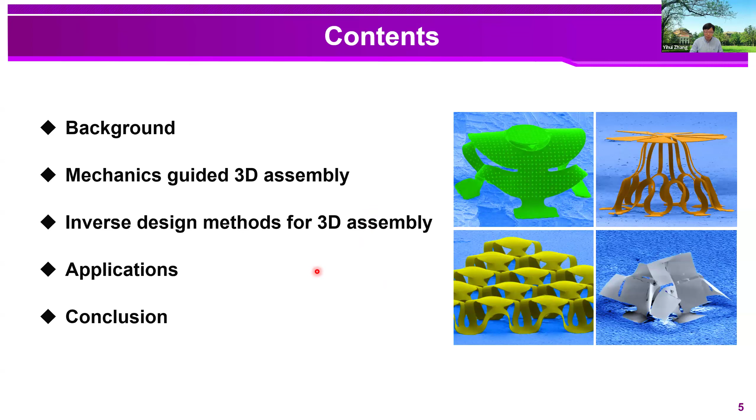Since the third dimension can bring brand new opportunities, 3D microelectronic devices have already become an important research direction in the era of post-Moore's law. When compared to 2D designs, 3D electronic devices can provide broader design spaces, better mechanical and electrical performances, and even brand new functions. For example, Professor Dae-Hyeong Kim from Seoul National University and Professor Young Min Song from GIST have made inspiring progress in bio-inspired electronic eyes. In this specific work, inspired by the unique structure and functional features of the cuttlefish eye, they have devised an artificial vision system that can enable high contrast and high acuity imaging even under uneven illumination conditions. This is attributed to the unique structural features.

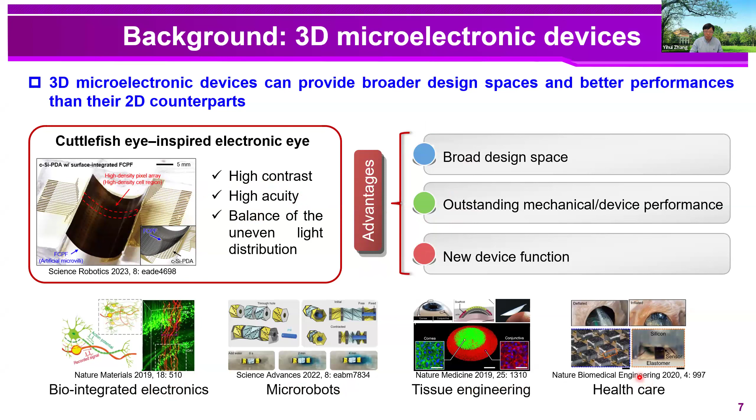Because of these outstanding advantages of 3D designs, 3D electronics have very important applications in bio-integrated electronics, microrobots, tissue engineering, and healthcare, with the potential to upgrade their device form. Then let's look at the geometrical and physical features of 3D electronic devices. These electronics usually have very small feature sizes, sometimes down to micron scale and even sub-micron scale. They typically have complex 3D shapes, involving, for example, multi-layer ribbons, curvy surfaces, and even hierarchical constructions. Under external loadings, for example, if you compress it, stretch it, or rub it, these devices show strong nonlinear mechanical responses. Additionally, these electronics usually contain multiple different functional components, including sensing components, actuation, wireless communication, and data acquisition modules. Because of these features, it's extremely challenging to achieve customized design and fabrication of 3D electronic devices.

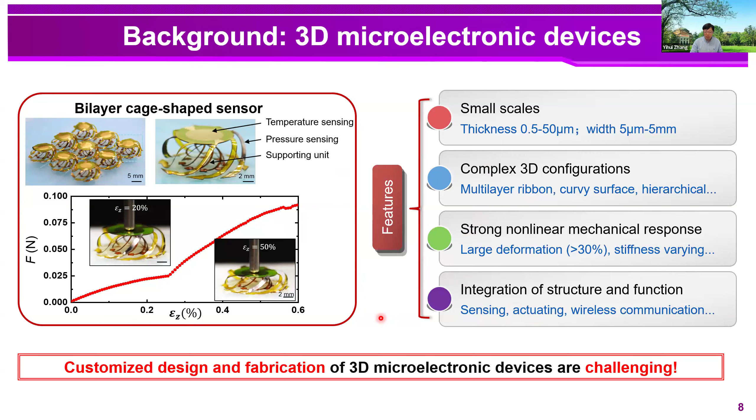In particular, the microfabrication techniques well established in semiconductor industries work very well for 2D inorganic devices and do not work directly for 3D fabrication. For example, this table summarizes some representative fabrication approaches for 3D electronic devices, including stacked 3D integration, residual stress-induced 3D assembly, peeling-induced 3D assembly, capillary force-induced assembly, and FIB-induced assembly. Each of these methods has its own advantages and disadvantages, as summarized here.

For example, the stacked 3D integration scheme can enable 3D devices with high integration density and also high machining accuracy. But because of the complex fabrication process, it's very challenging to achieve highly complex 3D geometries like a sphere or 3D networks.

The peeling-induced 3D assembly is a very creative method developed by Professor Huajian Gao, who is now working at Tsinghua University, and also Professor Xiaodong Chen from Nanyang Technological University. This method utilizes plastic deformations induced during the peeling to enable the transformation of 2D structures into sophisticated 3D architectures. This method works very well for metals and polymers, but remains challenging for semiconductors like single crystal silicon.

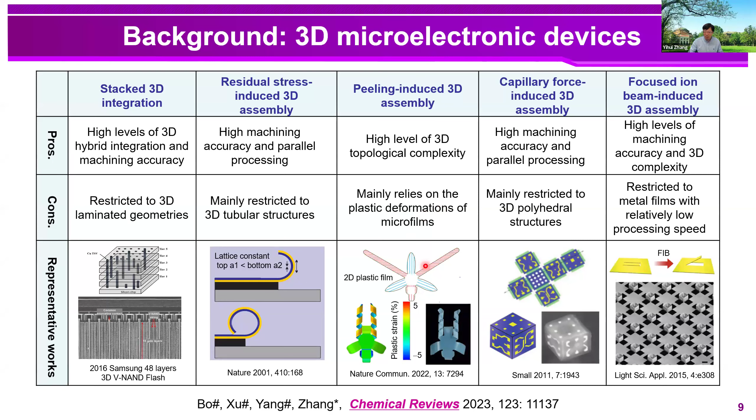So if we use a radar graph to compare these approaches in terms of material type, geometric complexity, fabrication speed, fabrication precision, and level of functional integration, you will see a large blank area in this region. Therefore, a grand challenge in the field is to develop an approach that can enable fabrication of complex 3D electronic devices in inorganic semiconductors and other high-performance materials.

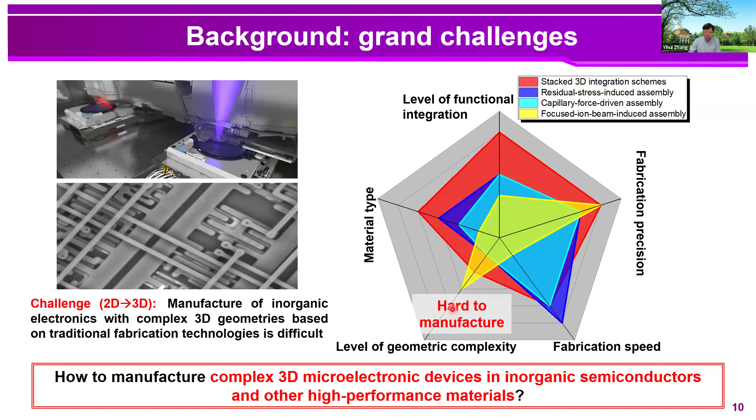So to address this challenge, we started relevant studies in 2012, and now we have established an approach distinct from all of the previous ones. The key idea is to go one step further beyond traditional 2D fabrication by using compressive buckling to deform easily patterned 2D structures into well-controlled 3D architectures.

After devising this approach, an important aspect involves exploration of the class of 3D geometries accessible to this approach. Another fundamental question is how to develop quantitative mechanics models that can serve as a basis for inverse design. This is also to answer the question of how to map the target 3D configuration onto the initial 2D pattern. In addition to developing the approach itself, we are also interested in exploring some unique applications enabled by this singular approach.

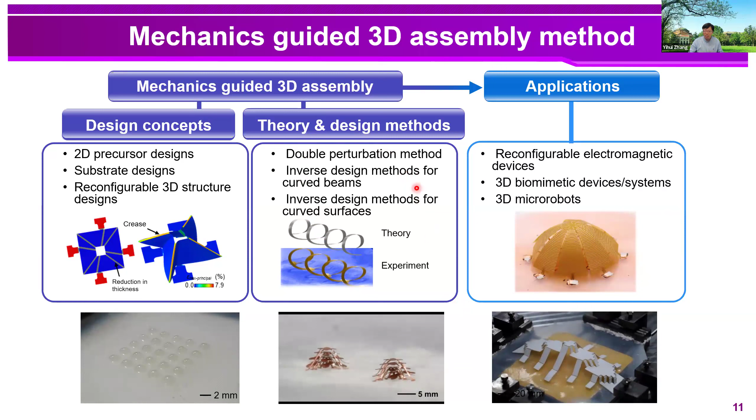Okay, I will use a very simple example to illustrate the process of this approach. The very first work in this area was done in collaboration with Professor Yonggang Huang and Professor John Rogers from Northwestern University. So here, we first need to use a soft material as the assembly platform. We apply a uniaxial pre-stretch to this soft material, and this platform will provide the forces required for the compressive buckling.

In the meanwhile, we can use a microfabrication technique to create a patterned 2D thin film. In this example, the film is made of single crystal silicon and shows a serpentine configuration. Then we integrate the patterned 2D thin film with the pre-stretched elastomer substrate. By using techniques of surface chemistry, we can create strong covalent bonding selectively only at the red sites. The other places in blue are simply weak interfaces and can pop up easily from the substrate surface after release of the pre-strain.

So in this example, the 2D serpentine deforms into a 3D conical coil after release of the pre-strain. This idea has been validated by our experiments. If you look at the SEM image here, this is the experimental result done in 2013. This material is made of single crystal silicon, the most important material in the information industries.

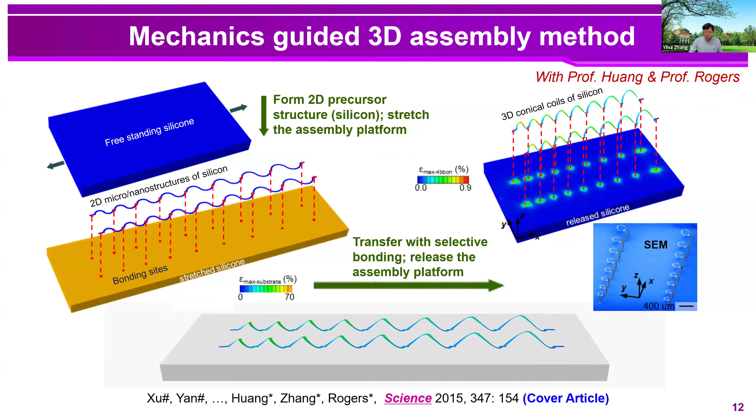Here I would like to emphasize that single crystal silicon is a very brittle material and can undergo just 2% strain before fracture. This means that if you stretch a sample from length 1 to length 1.02, it will break. So mechanics plays a very important role in the design, because we need to ensure the safety of the structure under such large levels of compression and deformation.

In short, our idea is to go one step beyond traditional 2D fabrication techniques, and we introduce structural design concepts to enable controlled 2D to 3D transformation. Planar fabrication can enable mass production, and thousands of components can be fabricated in one batch. Our 3D assembly approach is fully compatible with 2D fabrication, and therefore our approach can also assemble thousands of 3D mesostructures and even devices at one time.

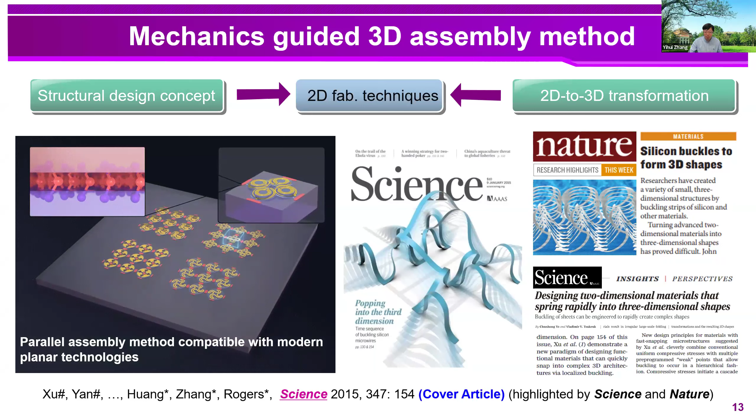One powerful aspect of this approach is the broad applicable range of material types. In addition to single crystal silicon, this approach also applies well to other semiconductors and also to metals, polymers, plastics, ceramics, and even piezoelectric materials like PVDF and PZT. Additionally, flexible printed circuit boards and integrated circuits can also be assembled into well-controlled 3D configurations, as shown here.

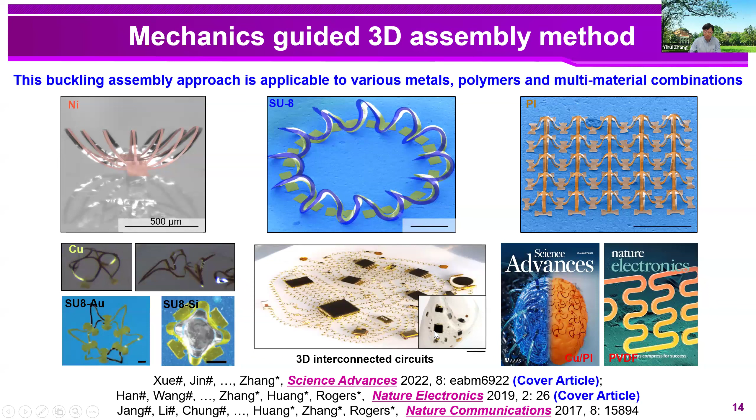Another powerful aspect is the applicable range of length scales. Unlike many of the other approaches, this approach applies perfectly well to a broad range of length scales, from submicron scale to even meter scale.

So here to provide some intuitive impressions, we compare our assembled structures with some objects in real life. For example, the submicron scale 3D structure has a comparable dimension to blood cells. In addition to the microscale 3D structure, see a human hair. So you can see a single human hair across this 3D structure. And the rightmost panel shows the largest structure we have achieved, which is comparable to a human body.

So after my group and our collaborators published a few papers in this area, our works were quickly noticed by the editors of Nature Reviews Materials and Advanced Materials, and they invited us to write review papers on these topics. So these works were both published as cover articles in these journals.

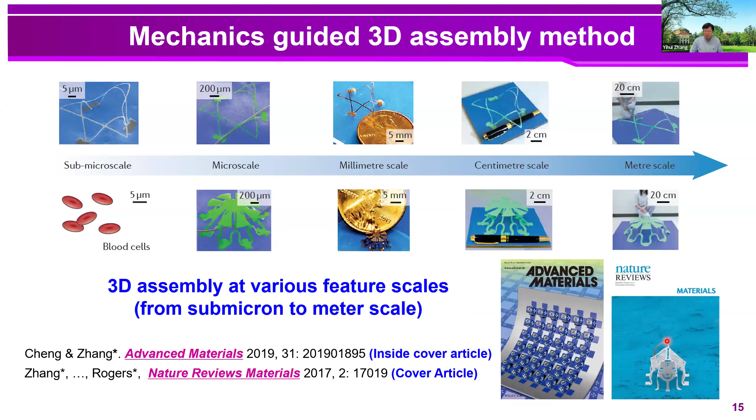In order to expand the range of 3D geometries accessible to this approach, we have devised a set of design concepts and strategies. According to the above introduction, you may notice that there are just 3 core elements in this 3D assembly approach, including the 2D precursor, deformable substrate, and how you integrate them together.

So for each core element, we have introduced a series of design concepts to strengthen the capabilities of the 3D assembly. So today, due to the time limit, I will just choose 3 examples to illustrate. And you may take a look at these publications if you are interested in the other part.

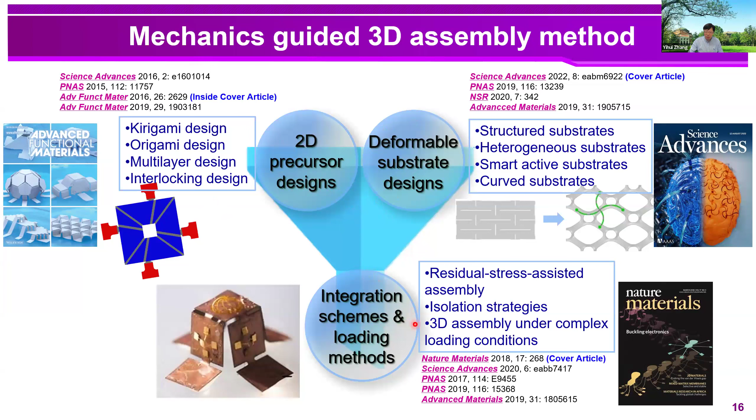So right after we published the first paper in Science to report the assembly of 3D ribbon structures, an intuitive idea is to extend this approach to 3D surfaces or 3D membranes. But a simple extension might cause unexpected issues, as illustrated on the left of this slide.

For example, if you assign 4 bonding pads uniformly at the boundary of a circle or a square, there will be evident localized deformations in the central area of the structure during the compression process. And this will lead to strong strain concentration. As you can see here, the peak value of the strain already reached around 5%. So in this case, if you use single crystal silicon to fabricate, it will break.

So to resolve this issue, we introduced kirigami designs to change the load transfer paths within the structure. And after introducing kirigami cuts, the localized deformations disappear, and the strain concentration is evidently relieved. So this is evidenced by the value of peak strain. In these 2 examples, the strain reduces from around 5% to 1.3 and 1.5% respectively. And in this case, if you use single crystal silicon to fabricate, they will survive.

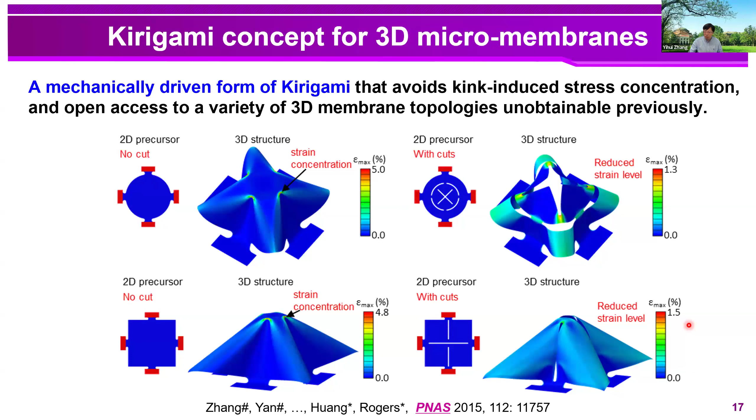Then let's look at an example of 3D silicon kirigami. And in this example, we introduce a set of fractal crossing cuts that divide a large square into 16 small squares, which are interconnected with each other. So this video shows a dynamic formation process of this 3D membrane structure.

And this one shows the experimental results in single crystal silicon with a thickness of 300 nanometers. As you can see here, the lateral size of the entire structure is around 200 micron. So this is very difficult to achieve using previous approaches.

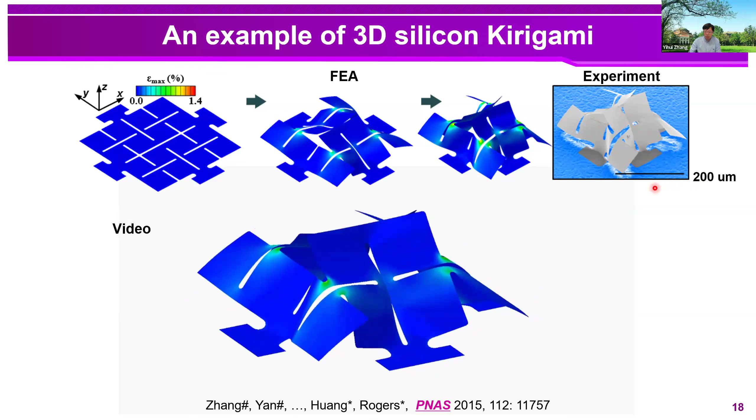Actually, there are many biological systems which show complex curved shapes, such as many plants and animal organs. So we sometimes want our 3D structures to be assembled on the top of curved substrates. And for this purpose, we have developed a kind of ordered assembly strategy that involves the use of predefined mechanical loadings to deform the curved substrate into flat or cylindrical configuration, followed by an additional level of pre-strain to trigger the buckling guided assembly.

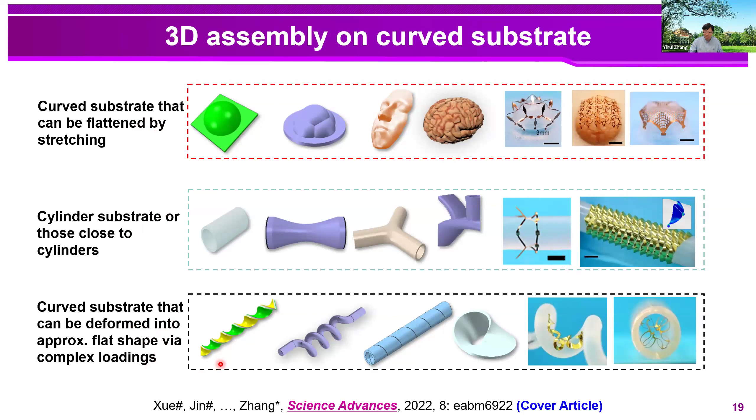And in this context, we have considered 3 types of curved substrates, including the curved substrate that can be flattened by stretching, cylinder substrates, or ones very close to cylinders, as well as curved substrates that can be deformed into approximate flat configurations by complex loadings, like twisting or combined twisting and bending.

So this slide shows the 2-step assembly process of the order assembly by using a human face substrate as an example. In this case, we firstly use a biaxial pre-stretch to flatten the substrate, and then apply an additional level of biaxial pre-stretch. And then we do the transfer printing. And during the release of the pre-strain, the first order assembly corresponds to the process of buckling guided assembly on a flat substrate. And the second order assembly corresponds to the pop-up of the substrate into the initial curved shape.

And this video shows a similar process of the 2-step assembly process for a metal ribbon structure on the top of the hemispherical structure. So the first order assembly corresponds to the assembly of the metal ribbon structure on a flat substrate. And the second order assembly corresponds to the pop-up of the substrate into the initial hemispherical shape.

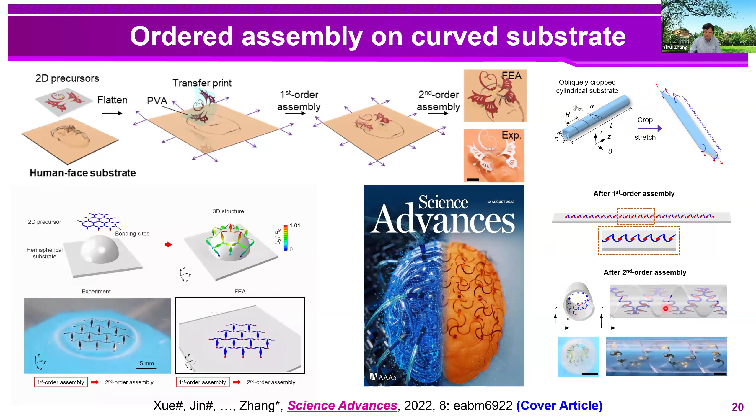Actually, in previous studies, we always release the biaxial pre-strain in the substrate simultaneously. The result is a deterministic 3D assembly, with the smooth changes of 3D shapes. Here I will show that for some specially engineered precursor designs, we can play with the sequence of the release in the pre-strain to achieve multiple stable modes of buckling. So here is an example to illustrate this idea.

At the center shows a crossing precursor design, which is attached to a biaxially pre-strained substrate. And here the green color denotes the creases with reduced thickness, and the red color denotes the bonding sites. Here, if you release the biaxial pre-strain simultaneously along two directions, the structure will follow this deformation path, and finally you will get this shape 1 mode.

But if you instead use the sequential release by releasing the x directional strain first and the y direction second, the x directional ribbon will form 2 waves first because of the constraint from the y directional ribbon. And after that, if you further release the remnant pre-strain along y direction, the entire structure will be trapped into this 2-wave mode, and finally you will get this shape 2 configuration.

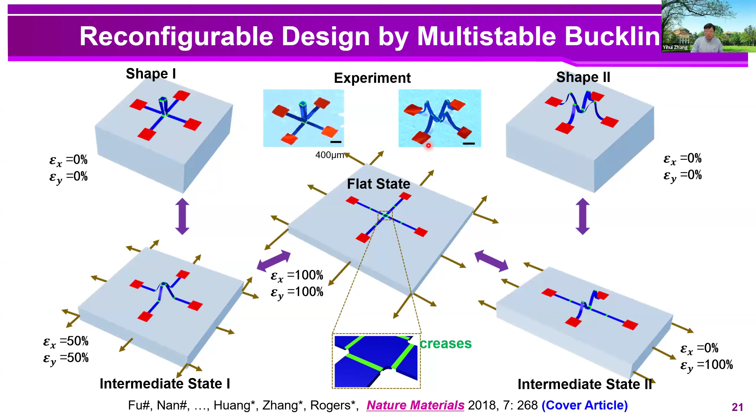This means that if you stretch and release with different sequences, the structure will be reshaped between the shape 1 and shape 2 modes. And this idea has been validated by our experiments at microscale. And this kind of loading path control strategy can be used to achieve more complex reconfiguration process.

And this one shows an example that corresponds to a structure that can be reshaped between an octopus and a spider. And this one shows the experimental results in metal with a lateral size of several millimeters. And this one shows the finite element simulation results. And this one shows the loading paths. So here, we can play the video again.

If you release the biaxial pre-strain simultaneously from two directions, the 2D structure will be assembled into this octopus 3D structure. And if you stretch the substrate again, the structure will go flat. And then if you do sequential release by releasing y directional strain first and x second, the structure will be reshaped into a spider.

And actually, this reconfiguration process can be done thousands of times, meaning that this octopus can be reshaped to this spider thousands of times, even if it's made of metal, because we can use mechanics design to control the value of the maximum strain in the 3D structure during the process.

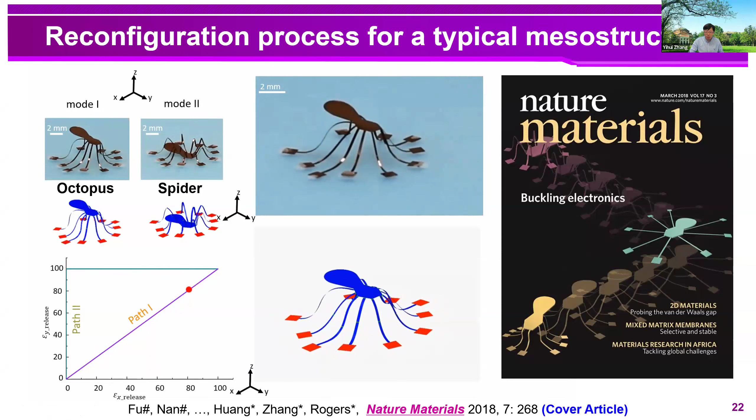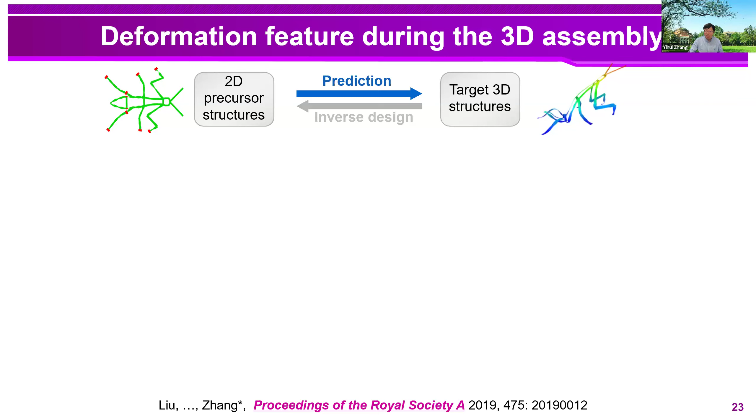Well, according to the above introduction, you may notice that this kind of 3D assembly approach actually corresponds to a process of post-buckling deformations in thin film structures. So it's important to have a mechanics model that can serve as the basis of the theoretical design. And for this purpose, we need to first solve the forward problem of predicting nonlinear buckling deformations for prescribed 2D precursor structures. So here we need to analyze the deformation features first.

And here, by using a helical 3D structure as an example, we can analyze the dominant deformations during the post-buckling process. And according to the analysis of the various deformation modes, we can determine that the post-buckling deformation is dominated by the out-of-plane bending and the twisting deformation.

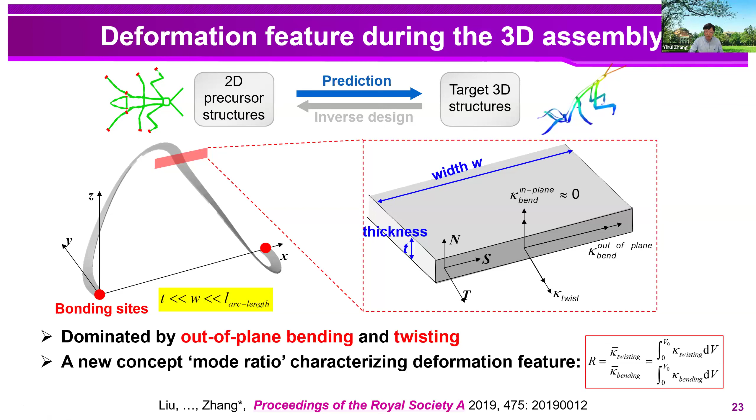Accordingly, we can propose a new concept called mode ratio to characterize the deformation feature, defined as the average twisting curvature divided by the average bending curvature. When the mode ratio is very large, the structure is dominated by both bending and twisting deformations. When this mode ratio is very small, it's dominated by bending deformation.

If you want to further predict the 3D configuration resulting from the 3D assembly, we need a predictive post-buckling model. For this purpose, we developed a double perturbation method for post-buckling analysis. In particular, we introduced two perturbation parameters to linearize the nonlinear governing equation, and by doing so we can obtain analytical solutions of post-buckling deformations and curvatures for general curved beams.

One of the parameters is related to the magnitude of the out-of-plane deformation, and the other is related to the magnitude of the initial flexing level of the 2D precursor. If you look at the results, you will see that the analytical solutions agree very well with our experimental results and also FEA results.

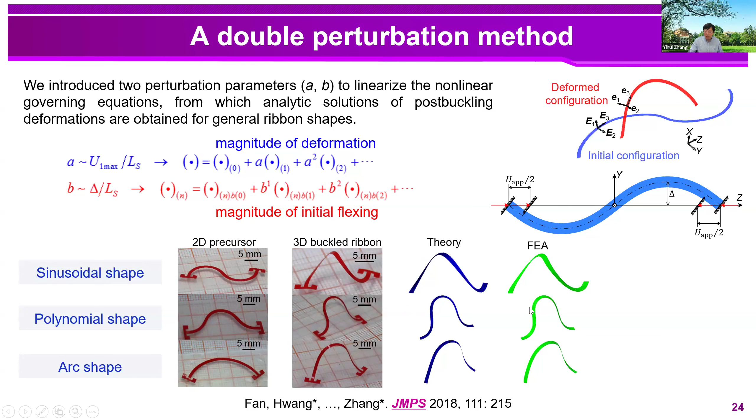The shape programming of the 3D assembly actually requires the development of an inverse design method to serve as a basis. But the inverse design is more challenging.

We have worked on this problem for around 6 years, and one of the solutions we propose is to utilize the spatial thickness variation to tune the curvature distribution during the assembly.

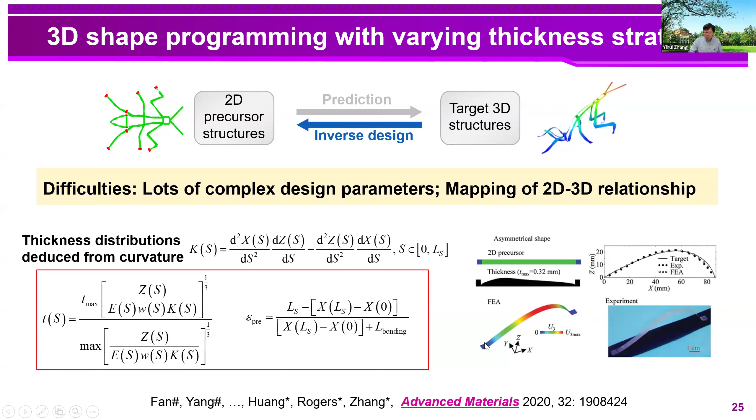In terms of the thickness variation strategy, we have derived a correlation of the thickness distribution in terms of the curvature distribution for a straight beam in the simply supported condition. According to this analytical solution, we can assemble arc-shaped or other asymmetric curved ribbons.

But for the thickness variation, the fabrication is extremely challenging because it's very difficult to achieve precise tailoring of the thickness variation for 2D films, especially for electronic materials.

According to our previous studies, by using gray-scale photolithography, the thickness resolution we can achieve is just 1 micron. By using this kind of technique, the smallest structure we can achieve is a hemisphere with a diameter of 4 millimeters.

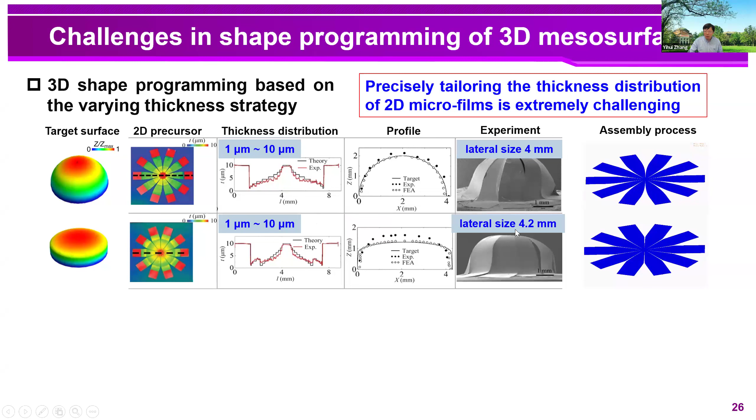But at this scale, you can also see a large distortion of the assembled structure from our design target. So here the challenges include the high nonlinearity, the bending-twisting coupling, and the high machining accuracy required. It remains very challenging to program highly complex 3D surfaces at the micro scale.

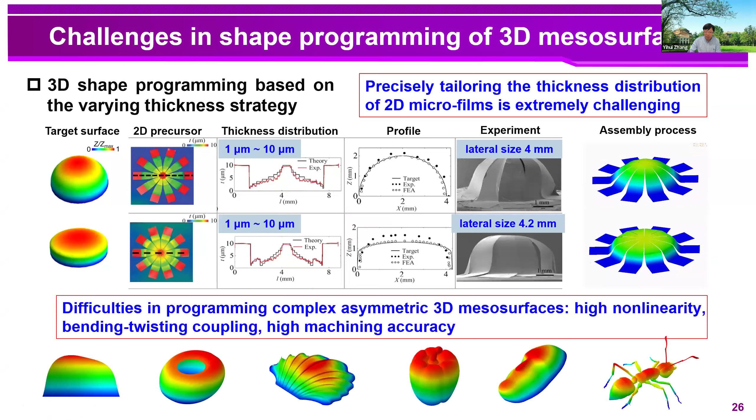To address this challenge, we turn to nature to find answers. We know that many cellular microstructures form naturally in plants and leaves to provide vital functions in their shape formation, in the transport of nutrients, and also during their evolution.

For example, the non-uniformly distributed cellular structure forms a closed cage in the Physalis and also in the Chinese lantern flower, forming a closed cage to protect their fruits inside.

Inspired by those biological 3D surfaces, we propose the use of porosity distribution in microlattice design to achieve desired stiffness control, thereby allowing their transformation into programmable 3D surfaces.

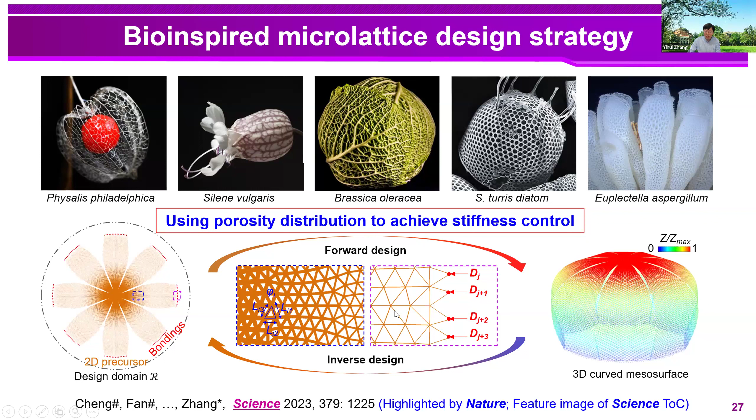By using this kind of microlattice design, we can bypass the technical challenges in gradient thickness control, because based on microfabrication techniques, we can easily control the width distribution in the 2D structure. The smallest width we can achieve is around several tens of nanometers.

We first show the capabilities of this microlattice design by using two flower surfaces as our design targets, including the stramonium and the jasminoid flower. Both of these surfaces have a certain degree of chirality.

By using our microlattice design, we can leverage the discreteness-mediated deformation and introduce locally controlled porosity distribution to reproduce this chirality in biological surfaces.

By modifying the local porosity distribution, we can even change the local porosity, and we can even change the chirality of the assembled 3D surface.

Then we look at the rational inverse design of the shape programming. In terms of the straight ribbon structure, the inverse design problem is to find an optimal porosity distribution of the 2D precursor that yields the assembled 3D ribbon, which agrees very well with our design target.

In the condition of a simply supported beam, we can derive an analytical solution of the porosity distribution in terms of the curvature distribution and the width distribution.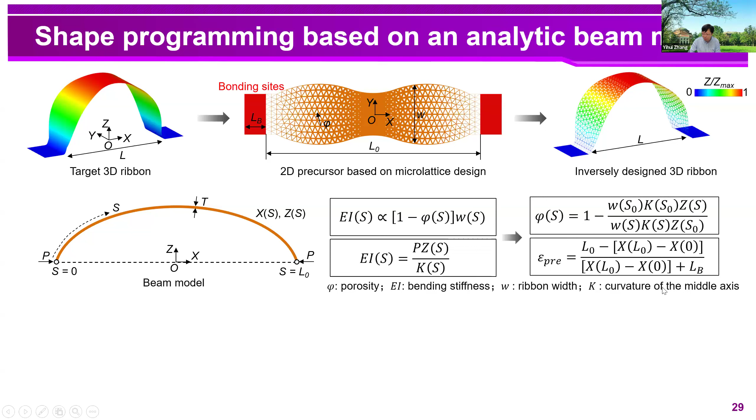If you look at the results here, you will see that the analytical solution agrees very well with our experimental results for arc-shaped ribbon structures.

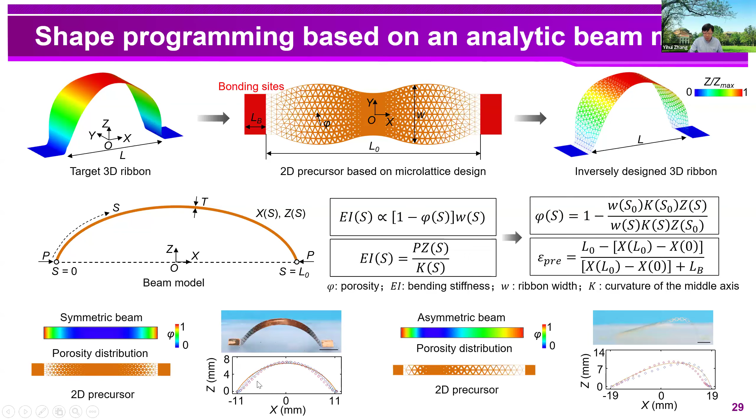So this model of the ribbon structure can be extended to the inverse design of curvy surfaces with central symmetry. Here, for a specific example of the octopus surface, the flow of inverse design is like this.

We first use the idea of discretization to form this design target with a set of developable ribbon components. Then, according to this solution, we can derive the stiffness distribution and porosity distribution. With this information, we can construct the 2D precursor with micro-lattice design using fully triangular lattice patterns, and then testify the design using numerical experiments and real experiments.

According to the comparison here, the profile of the octopus pad shows very good agreement between our experiments and our design target.

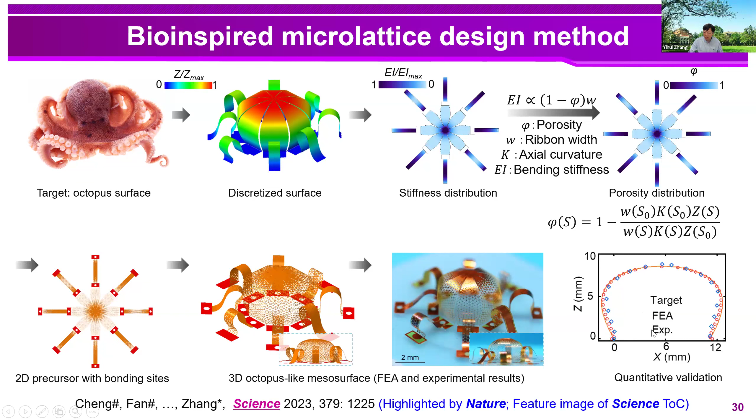Based on this inverse design method, we have achieved the inverse design of more than 10 axisymmetric meso surfaces, with a few examples shown on this slide, including the hemisphere, this volcano-like surface, this palace-like surface, as well as an entire sphere, the vase-like surface.

Here, these four videos show a dynamic formation process of the micro-lattice 2D structure into the 3D surface. This one corresponds to our experiments, and this one is numerical simulations.

Here I would like to emphasize that these surfaces have a curvature radius of around just 1 millimeter. At this scale, we can achieve accurate shape programming for different kinds of 3D structures. This is very challenging to achieve, especially by using single crystal silicon.

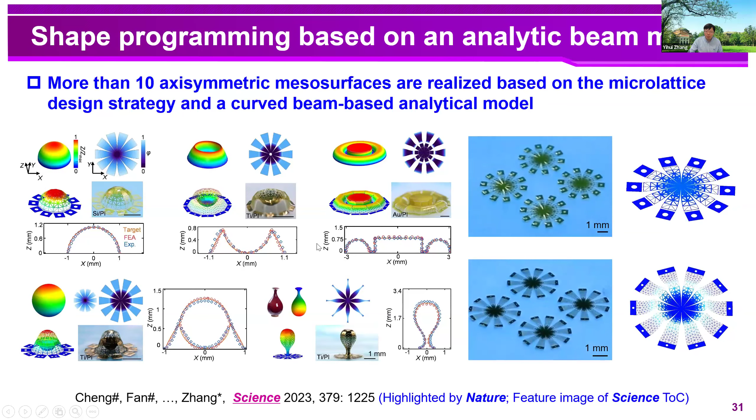Because this method is fully compatible with 2D fabrication approaches, it can be used to assemble 3D surfaces in a variety of materials like graphene, laser-induced graphene, polymers, monocrystalline silicon, and also amorphous silicon, as well as other materials. The length scale also ranges from a few hundred microns to centimeter scale.

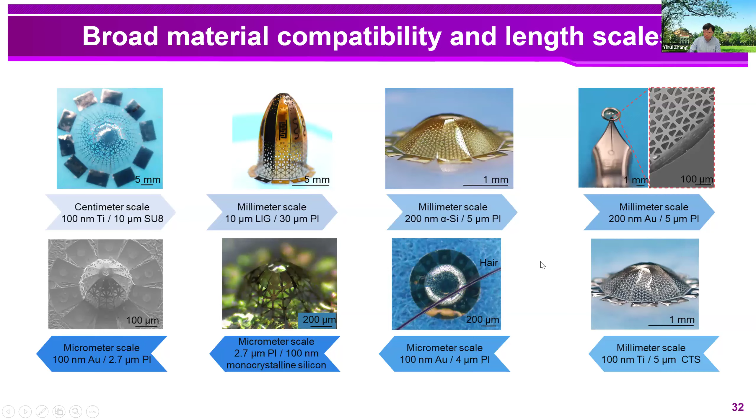So if the target surface cannot be discretized into a group of developable ribbons, the beam theory I just showed will not work. In this context, introducing a machine learning algorithm allows us to develop a more general inverse design method for 3D surfaces with general symmetries or without any symmetries.

In particular, we exploited a point cloud-based neural network to predict the 2D point coordinates and the porosity distribution for a prescribed set of 3D coordinates. In this example, you can see that this method works very well for a seashell surface.

In this example, we divide the entire surface into 11 developable ribbon components.

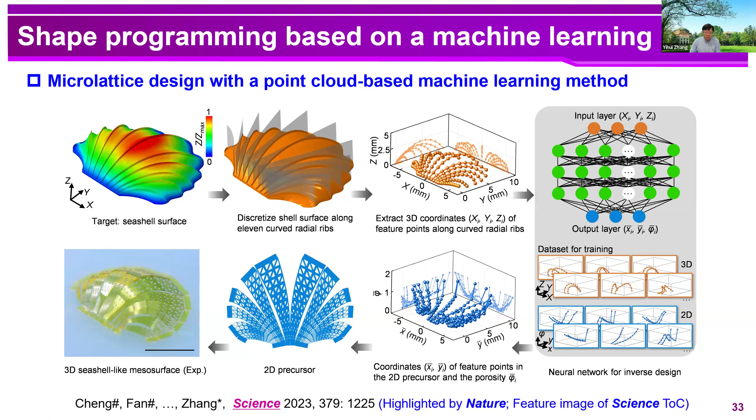Here are two more examples of 3D shape programming based on the machine learning algorithm, including a pimento-like mesosurface and an ant-like mesosurface. By discretizing the ant-like mesosurface with a cutting strategy inspired by CT, we can generate the 2D microlattice design from the machine learning model.

As you can see here, we can use around 4,000 micro triangles and around 8,000 micro ribbons to reproduce this ant surface at a millimeter scale.

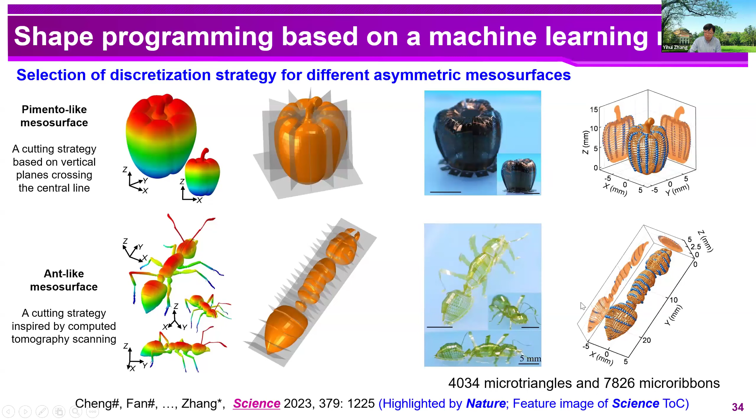This octopus surface and this ant-like surface were fortunately selected by the editors of Nature and Science to highlight in their journals.

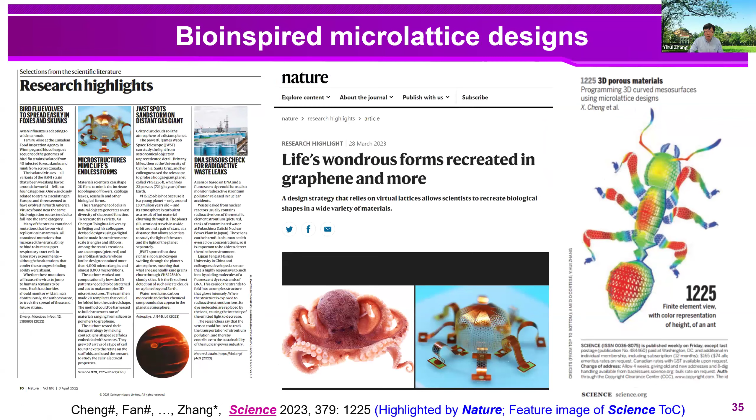Due to the powerful capabilities of the 3D assembly method, it can be used to develop different types of new electronic devices and systems, such as 4D antennas, whose radiation pattern can be tuned on demand, and 3D bio-integrated electronics that can be mounted on a variety of organs, and also 3D microrobots with different locomotion modes.

Here, due to a time limit, I will choose a few examples to illustrate in this talk. Firstly, this kind of microlattice design allows us to construct 3D electronic systems with desired 3D shapes.

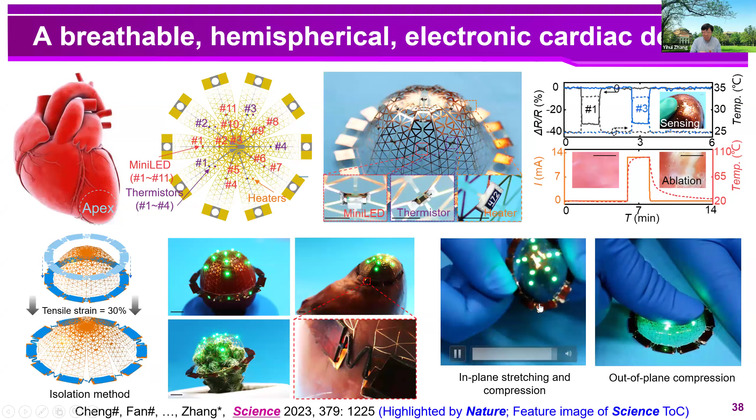To increase the reliability of the 3D electronic device, we developed an anti-fatigue design strategy. The key here is to convert the metal-dominated fatigue failure into polymer-dominated failure. Our fatigue experiments showed that even by adding a very thin polymer layer, the fatigue life can be significantly increased, for example to above 100,000 cycles.

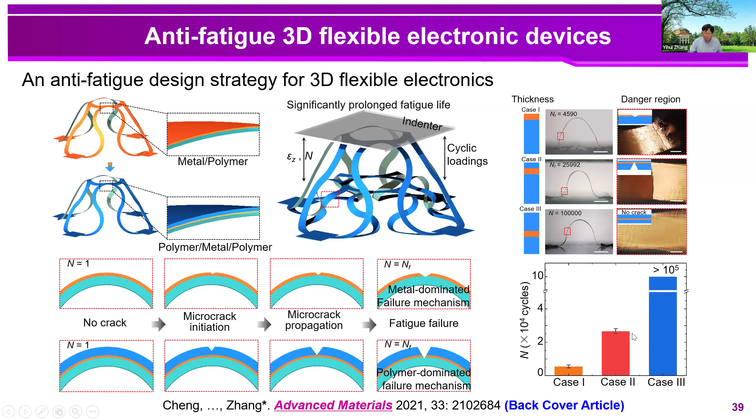Based on this strategy, we developed an anti-fatigue temperature device capable of decoupled temperature sensing based on the low thermal conductivity of air. One of the sensors is on the back of the substrate, and the other is on top of the 3D structure. Using this kind of device, it can monitor both the temperature of the contacting object and the temperature of the sensor itself. This device can be compressed repetitively to around 62% by over 100,000 times without failure.

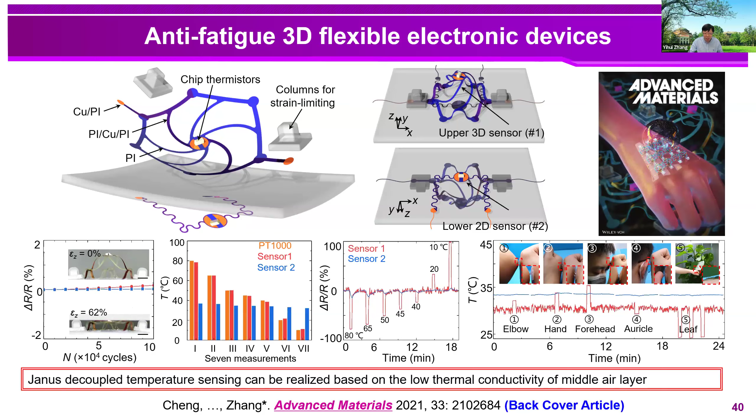Based on this method, biomimetic 3D structures that imitate the dynamic characteristics of living organisms are also possible based on the microlattice design.

This slide shows a stingray-inspired bimodal actuator. When the stingray swims in the water, it has two typical swimming modes. One is to have two fins flapping in the same phase, and another is to flap the two fins in different phases.

Inspired by these different modes, we designed two circuits integrated with the fins, which can generate periodically varying Lorentz forces to trigger vibration. As you can see in the video, two different vibration modes can be excited by varying the current direction and frequency. One vibration mode has a frequency of 5 Hertz, and the other has a frequency of 100 Hertz - quite different.

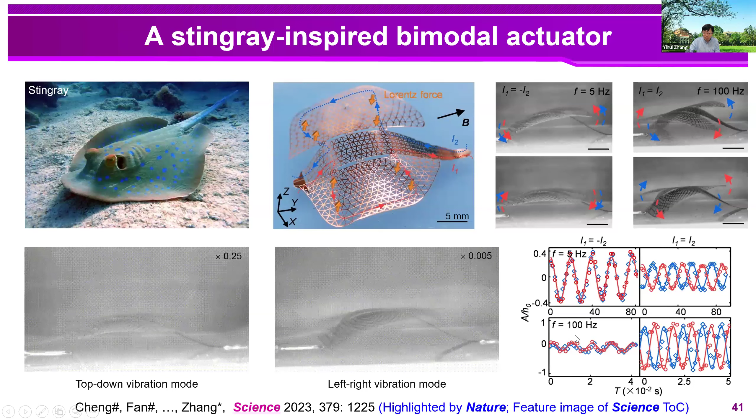Here shows a soft climbing microrobot. This work was inspired by the pioneering work on climbing robots done by Professor Guoying Gu from Shanghai Jiao Tong University. In this example, we use the 3D assembly approach to design a set of LCE-based 3D microactuators with large actuation deformations. Based on these microactuators, we fabricated a class of 3D microrobots much smaller than a coin. Due to the conformal footpads, the microrobots can climb on various curved surfaces with both constant and varying curvatures.

Inspired by the locomotion gaits of Hydra, the microrobot can also achieve both stepping and flipping locomotion gaits. As you can see here, the microrobots can achieve transition between different walls with both stepping and flipping gaits. As a result, the microrobot integrated with a camera can climb and detect the environment in a narrow space.

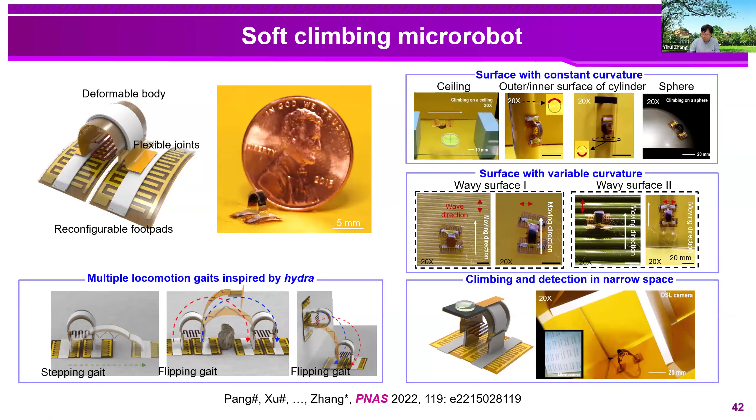Here is a short summary of this talk. We have developed mechanics-guided 3D assembly methods for microelectronics with different materials and a variety of structural topology. We also introduced bio-inspired microlattice design to achieve accurate shape programming. This method can enable unique applications in a diversity of areas.

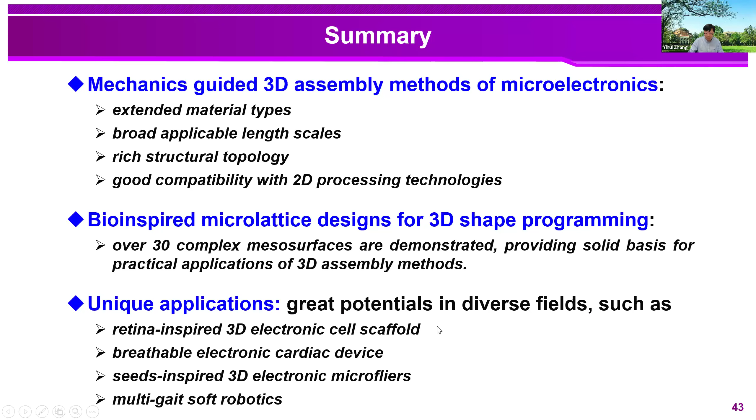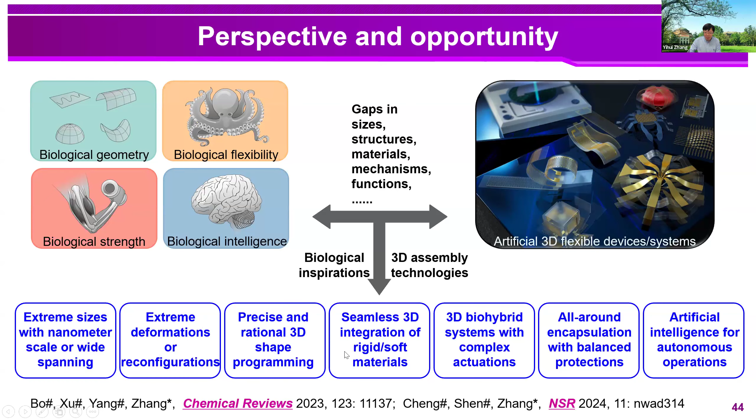There are also many opportunities in this very young field. Because of the gaps in size, structure, materials, and mechanisms, there exist lots of opportunities to match 3D assembly techniques with biological counterparts to achieve enhanced biological geometry, flexibility, and biological intelligence. Here are a few areas with many opportunities, such as developing new approaches to achieve extreme sizes or a wide range of size spanning, and exploring extreme deformations or reconfigurations based on new 3D assembly methods. There are many other examples I will not repeat here.

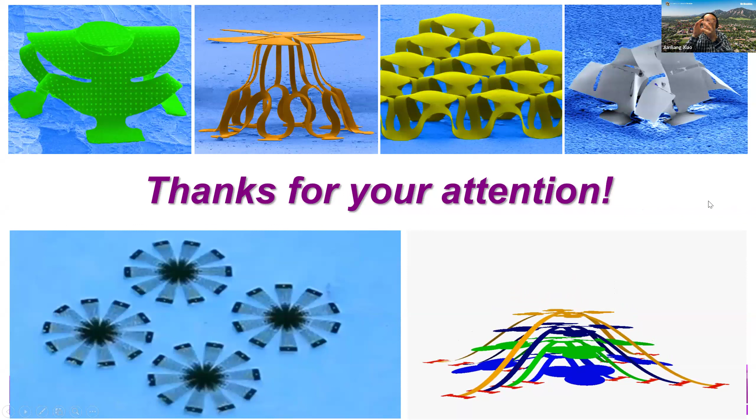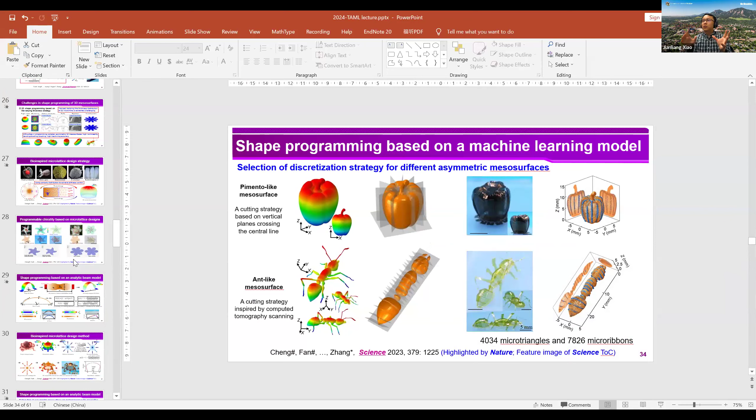So first of all, Professor Zhang, you showed a very interesting picture. You transferred devices onto the flattened human face substrate. And because of the complexity of the human face, I can imagine it must be very difficult to make it completely flattened. So are there any challenges when you try to transfer print the device onto the substrate?

Yeah, it's a very good question. So your question is regarding whether there are any challenges to transfer print 2D structures onto the pre-stretched human face substrate, right? Yes. So actually, this depends on how small your 2D precursor is compared to the feature size of the human face substrate. In our example, when the feature size of the human face substrate is not so small, it's okay to pre-stretch it to an approximately flat configuration, and the success rate of transfer printing is quite high.

But if the feature size of the transfer printed 2D structure is very small compared to the feature size of the human face substrate, then there will be some failure because of the small curved shapes in the pre-stretched substrate. So this depends on the comparison of the feature size of the transfer printed structure and the curved substrate.

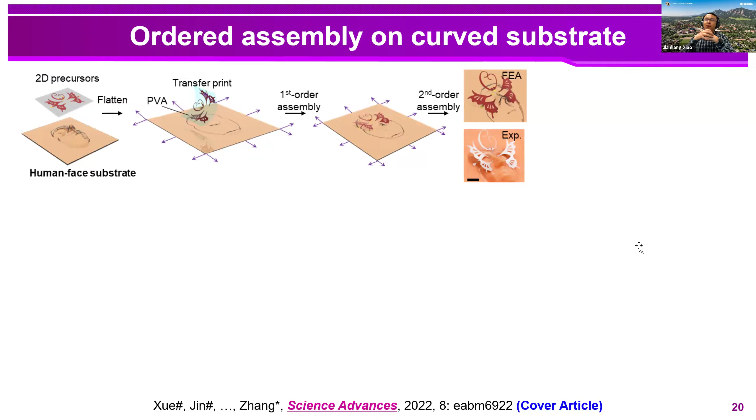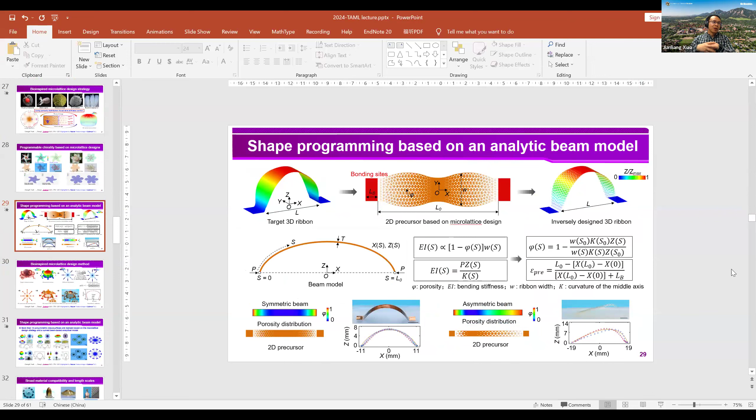Yeah, I have another question. On slide number 28, you use the lattice design to change the distribution of mechanical properties to achieve a lot of interesting three-dimensional structures. And before that, you also mentioned controlling thickness variation through different regions of the material to achieve different structures. So was there also any thickness variation in this lattice design?

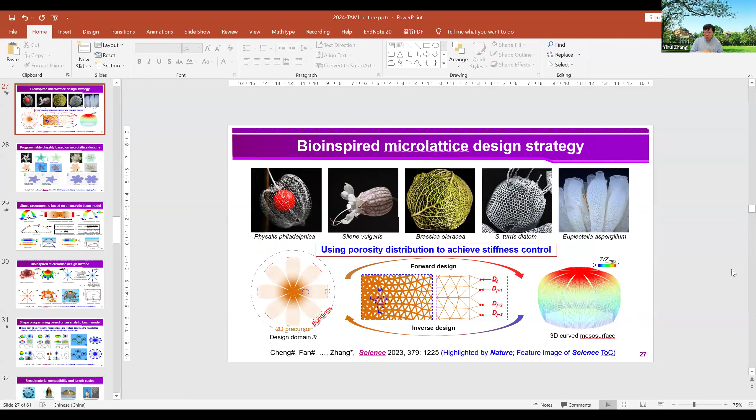Okay, this is also a very good question. Actually, the purpose of this microlattice design is to bypass the technical challenges in gradient thickness control. For electronic materials, it's quite challenging to fabricate 2D films with gradient thickness variation. So by introducing this microlattice design, we use the non-uniform width distribution in the microlattice pattern to achieve the desired stiffness control. In the examples shown here, we just change the porosity distribution in the microlattice, and there is no thickness variation in the thin film.

Okay, sounds good. So that means you actually have more degrees of freedom that you can add to your next design to achieve even more possibilities, right? Right, correct. This is the key advantage of the microlattice design.